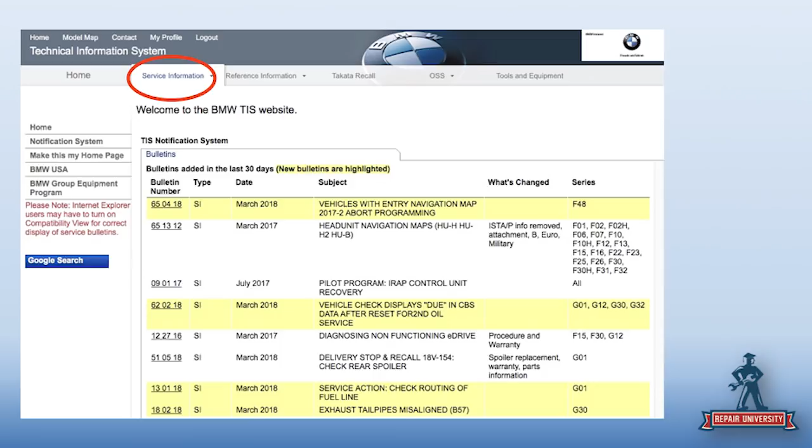To show you how quickly they change information, everything highlighted in yellow is within the last 30 days. So half of those are the last 30 days, and the other half are older than that. But aftermarket sources and companies like that are not going to be as up to date that fast - and it's the little things that change that we need to know about.

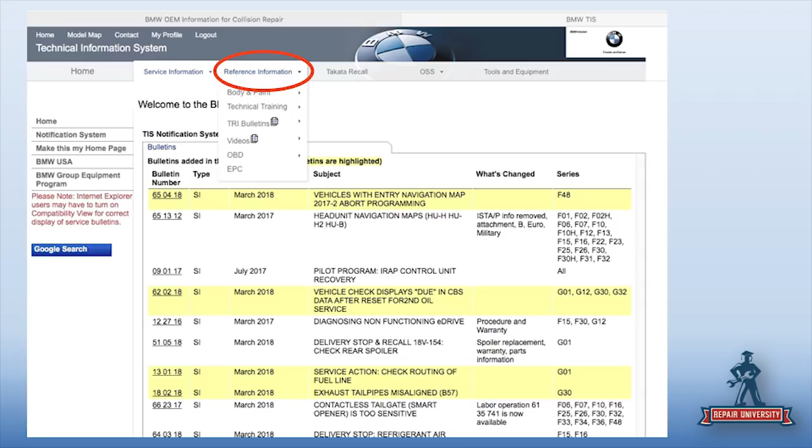Going over from the top after the service information tab, the next tab is called reference information. This was one of my favorite places. Obviously vehicle-specific information by VIN is what we need to repair the car, but there's a lot of great resources here. If it was me, back in the days of being an adjuster or claims manager, I would spend the $30 just to come in here one day and have access to this information under this tab alone.

Well, that you'll pay for. Yeah, there's some great things there. That I'll pay for. Now you're getting it - I wondered how long it was going to take. God, I owe you $20, Mark. He got on faster than I thought. I was sure it was going to be Halloween before Larry would catch on, but he's already got it in March.

So there's just some great stuff here. As an example, if you scroll down to body and paint and click that, you'll see all the little things that open up for you there. That's where you'll find their small damage, medium damage repair manuals, plastic repair, collision estimator training, aluminum and carbon fiber - it's almost like a little mini I-CAR in here, and it's fantastic.

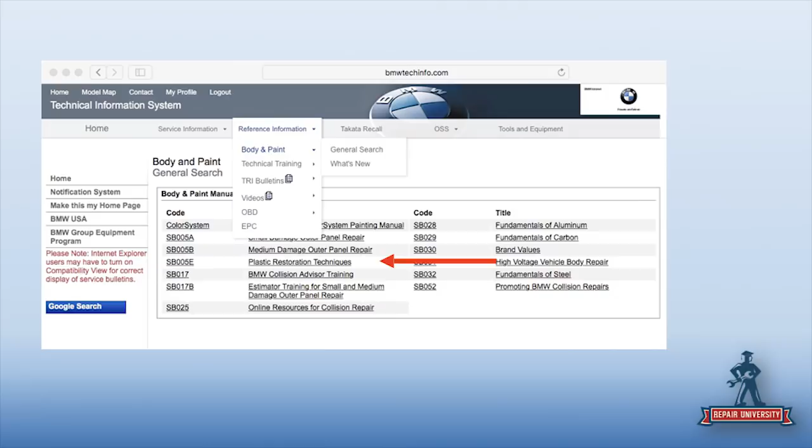Some of the stuff that you have - if you click body and paint, and go down to where it says medium damage and plastic repair, there are the courses. I even recommend new technicians, young technicians - you'll get more information for $30 than you can probably get from any other class. Just spend your time poking around and reading through it.

And you were telling me that Randy Perfetta and some other people probably played a role in some of this development. I believe Randy, along with Summit Consulting, who do a lot of training for the dealerships and for certified and approved shops across the country, had a lot to do with some of this technical training being put together. Randy originally started with Car-O-Liner Metropolitan with the Demerists, then moved on to Toyota. From Toyota, I know he wound up with AutoNation for a while, then went back up to Car-O-Liner Corporate, and now he's back with Summit, working with them and giving them his knowledge.

He runs a really good customer service class that we've attended - that was really, really good. He actually does a pretty cool thing that I thought was a great idea: he calls up all the shops who go into the class, and he tape records what they talk about.

Like on the phone, how you answer the phone, and then he plays them, and everyone's like, 'Oh, that's bad, that's bad, that's bad,' and no one really wants to say anything. I remember one of my clients I was there with in the class, he actually said, 'That's my guys, we need the most help,' and he actually hired Randy and Summit to come in afterwards and train his people for better customer service on the phone lines.

So the Germans overall do a great job with their hands-on training, their access to repair information once you're on their program, these mini classes or classes on particular stuff, and then obviously the hands-on training, which is why the Germans are so much far superior. I always talk about it, and those out there who've been through German training realize that. Those who haven't are like, yeah, okay, what's so great about them?

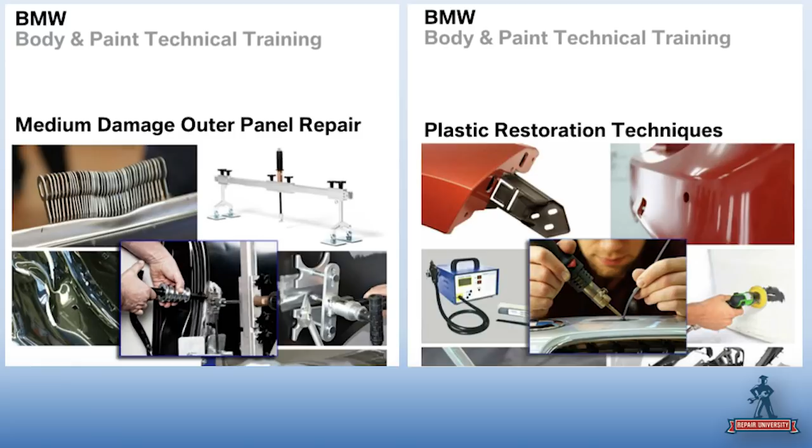If you don't understand a lot of dent repair, not just how to fix a dent but the theory behind it, where you put your keys, where you make a pull and why, how it affects body shaping, all of that is in the medium damage class. A lot of the science behind it. They even have an aluminum panel repair class on how to do aluminum panel repairs.

A lot of the procedures in the specific car stuff is also in the generalized area here, about what you can and can't fix, how much material you're allowed to put on, and stuff of that matter. It's great stuff.

I'm not a big fan of printing and saving, because this used to bite us in the insurance industry. We'd put out claims guides, you were supposed to update your claim guide every year, but someone didn't. Someone always squirreled it away at the bottom of their desk, and then we'd get a discovery notice for a lawsuit, and someone would bring out the claims manual from 1982, and we're taking depositions on a 1982 claims manual saying we updated it 26 times since then.

So I'm not a big fan of printing and saving because that always happens—you refer to it or make copies and hand it out, and then you miss the update. But this, if I had new techs or new estimators, even if we don't fix a whole lot of BMWs, this stuff is gold. Kind of like Toyota's classes in the first episode had some good stuff.

Scrolling across, we'll come back to the OSS one, but if you go across the top to tools and equipment, if you've ever wondered what tooling and equipment, mechanical and or collision repair, BMW requires—I don't want to say approves, but these are the required things to fix their vehicles.

It's approved equipment that's required to do the repairs, and without it you could wind up in a lot of trouble. I've been involved in cases where shops didn't have the proper equipment and couldn't prove they even rented or borrowed it—they just said, 'No, that's my equipment.' Just that alone can get you in trouble, besides the bad repair. If you did a perfect repair on non-approved equipment, you're probably not going to get investigated. But if you did really crappy repairs that are incorrect, and you also have the wrong tooling, it adds to the snowball that blows up against the shop.

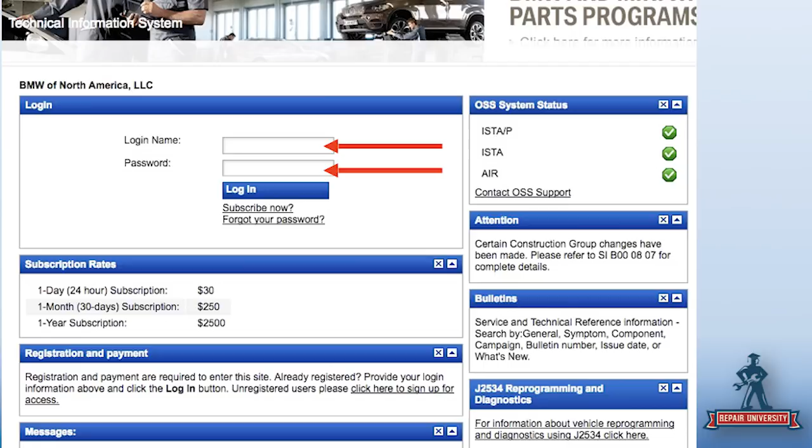After the site comes up, when that green square appears and says start, it's ready for you to go. If you remember, all the way back to the very first log on, when we hit the screen that says OSS system status with all the little green checks, that gives us that green square. So we know everything's up and online, they're not updating the system, we're good to go. We are ready to find our repair information.

So I click start, and it immediately takes me to a screen asking for the VIN number. You can do a lookup by body code if you know the body code. If you know the body code, right. I don't know the body codes.

And listen, like I've said before on numerous shows, Mark and I have said it, I-CAR, whoever's been here from I-CAR, usually Jason, we've always said the same thing: always put the VIN when you're using the OEM website. I know All Data has a thing for the VIN also, but always use the VIN for the OEM website, because you're going to get one important thing that you won't get if you don't put the VIN in. We'll talk about that in a second.

So for this particular situation, we went and got a VIN from a 3 Series. We thought we'd start with the 3s. Turns out we didn't get much further, but we got a VIN for the 3 Series. We have entered our VIN, and this is where it takes us to.

So now I know the status of the warranty, when the warranty went out. I know the service history of the vehicle. I know any recalls down to the technical campaigns at the bottom. If there's anything pending on this car, it's there for me. I know the color, and now I have the body code.

So for people like me, which molding and trim package, and it's an F30 - this quarter is good for these years on this body, and it's like, oh my God, which one? This helps answer those questions for me.

And there's a lot of cool things. I know you're going to click through here, but you've got repair instructions on the F30. Look at all the other stuff that they've got in there. You could click around, and you've got your torques, your technical data, repair and maintenance, operating fluids. There's a lot there.

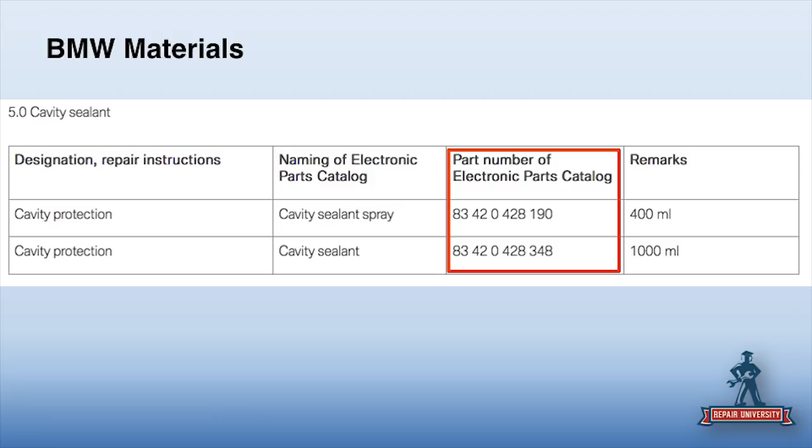For here, there's 2 different sizes of their cavity sealant spray, cavity wax that you can buy. Those are the part numbers for it. BMW says put it on, plain and simple. If you don't do what BMW says, well, you didn't fix the car right. The easiest thing to do is order from the manufacturer.

We have cabinets at the 2 shops I'm mainly at all the time, my shop Exclusive, and then MIC. They have actual cabinets with Benz, Audi, Porsche, Volkswagen, and all the stuff that they need that they can keep without a born-on date that's going to go bad. They keep it in there, even adhesive, because they know BMW goes through a lot of adhesive, so they can buy stock of like a case of it, because they know within a month they're going to use it.

There's rivets, there's all sorts of stuff, and then we have separate drawers with the known clips. All the clips are in, the extra clips are inside the cabinets, but now you don't need to mix anything. So now when you need more cavity wax for the BMW, it's in the BMW section. If I'm doing a BMW and a Mercedes-Benz, I'll go to both cabinets. If it's the same product, not a problem. If I'm using different products, I have it there at my fingertips. It's set in, almost like a supermarket within your own body shop.

Yeah, and you just go in and check it out. The great thing about a part number means it's pretty easy to put that on an estimate. You've got an invoice, you can put it on the estimate, and even if you don't put it on the estimate, do it for free. At least you're doing the right product.

Most of the dealers wouldn't know this because not a lot of people order it. The dealership doesn't usually order it, so you would have to give the parts manager, or part guy, the part number. He'll get it for you, and it makes it that much easier for him and for you in the long run.

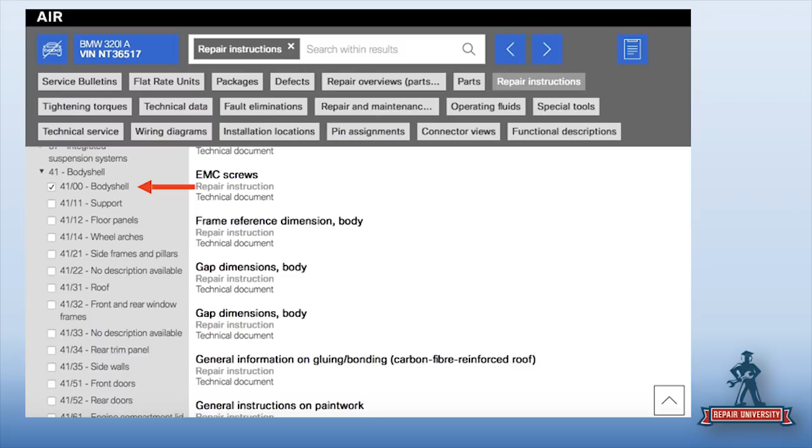Scrolling through there, when we get to that general under-body shell, one of the other things you get to is material identification. We have a great panel identification here, and I got to know the body numbers to know what the panel is made out of, aluminum, plastic, or steel. I find my body number in there.

So if I'm thinking about what's repairable, not repairable, we'll get to a little bit of the guidelines, and there's a lot of numbers there. I'll tell you this much: when you go to the certified training, they give you a sheet each time of all the body numbers, because sometimes there's a new model that comes out, there's a new body number, or the 3 Series changes enough that it loses that body number and goes to a different one. So we'll get that listing to understand what it is, and there's a cheat sheet I utilize for myself.

But if you ever get confused, seriously, all you got to do is Google, say, Wikipedia. You can Google in Wikipedia, BMW F01, F02, and it'll give you the listing of each one.

That's a quick, fast way of getting the information, so at least you start to get acclimated to the vehicles you're working on and exactly what they're looking for, because they make a lot of the vehicles the same. Normally your estimating system, when you pull it up and put the VIN in, it'll give you the body number there too. You've got to look for it.

But I always tell people, for me, material identification in the estimating systems has been a little hit and miss. I'm just saying from the body code, the body number they'll give you. So if I get the body code through the estimating system, I will say this much, All Data is good at that too. You can look it up in All Data.

So let's say you wanted to find out what all those F numbers are and you have All Data, but you're using the BMW site. If you go 2015 BMW, and it gives you the list of cars, just open the cars. You'll see the 3 Series, and in parentheses will be the body number. That'll help you out too.

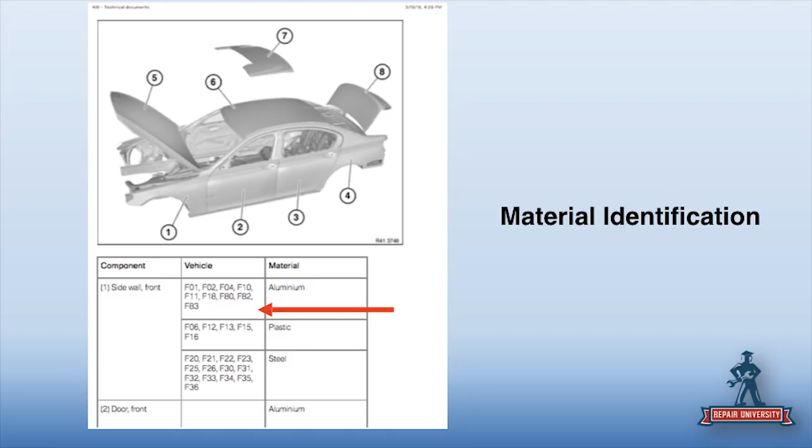One of the things I learned from my conversation last week with some of the BMW folks was that while the 3 Series particularly is mostly steel, when we get into the M packages, some carbon fiber and other things are going to come to the table. So knowing my material identifications and knowing that body code, not letting the estimating system tell me what is aluminum or steel when I'm making my repair decisions, is critical.

One of the things I love about what BMW does is they classify body repair levels. There are 3 levels — 1, 2, and 3 — and we'll show you a little bit later as we get to procedures. As you're going through procedures, it automatically tells you what level of repair BMW classifies this, and within those levels there are certain requirements.

So Mark, talk to us a little bit about the levels. Well, level 1 is regular basic bolt-on type stuff, outer body, skin components, that kind of thing — so level 1 is your basic, you know, replacing a fender or something like that. Now body repair level 2 and level 3 — the big difference between the two is whether you're going to put it on a bench or not have it on a bench.

So when we look at the 3 Series here, we replace the quarter panel, and in that particular case it says body repair level 2. Well, what does that tell us? Very simple — we're not going to have to put it on a bench. Now if we're on a 5 Series or a 7 Series, and it says it's a body repair level 3, it's going to be on a bench. So if we see body repair level 2, it's without a bench, and level 3, it's with the bench. It's actually really simple.

Yeah, and that's a good key to me for estimating, because if I have to bench a car, it doesn't mean I'm necessarily setting up and measuring a car, right?

And then maybe I have to set it up and measure it, but then I'm also going to have to pay to re-bench it for the repair process, and then I'm going to have to pay dry time, or push it in the paint.

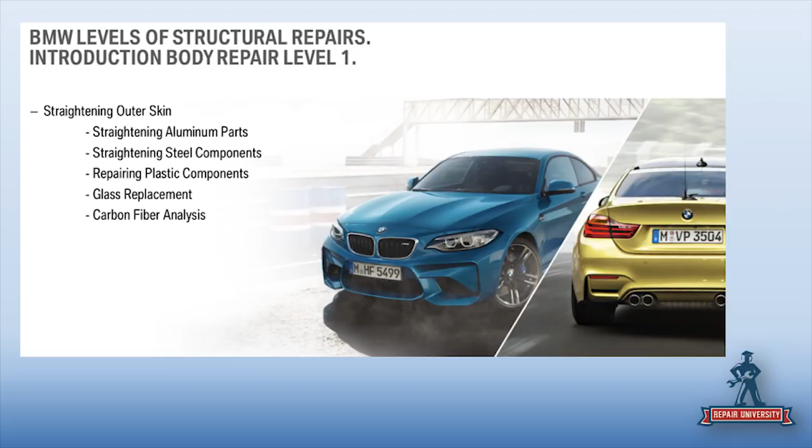Straightening the outer skin, so body repair level 1 would just be straightening. A lot of PDR level 1 can happen a lot. That's going to be your straightening of your aluminum, your steel, repairing of plastic, glass replacement, and analyzing carbon fiber. All that's considered level 1.

So let's talk about dent repair a little bit, because BMW has some really strict guidelines on what is and isn't repairable, what you can do, and then they give you some great training on how to fix their cars, which is just fantastic. I definitely now, watching this a little bit more, understand the value of the STEP program that they have.

So they always say that their STEP techs are all over the country, and now you kind of get it if this is the kind of stuff. I believe almost every program out there right now has a former BMW STEP program person that's involved in their certification program, that has a hands-on training program.

I was with Taylor from Mercedes-Benz last week in a class, and we were talking about Walter Malik and BMW and the training. But almost everybody Walter Malik has touched as a trainer and taught and cultivated are part of some sort of program. Sean Hart and Kelly and everybody out there has been along with Walter at one time or another from BMW, and all these guys started a STEP program.

Well, you think about it, it's amazing—everybody coming out of there, from David, who's kind of the collision tech industry, to Josh, to Gabriel, who was there before, to Nick Brown, to Sean, to everybody. I guess there's a reason why they're all so cool and we like them. So there's some people we don't like—we'll talk about them later, but these people we do.

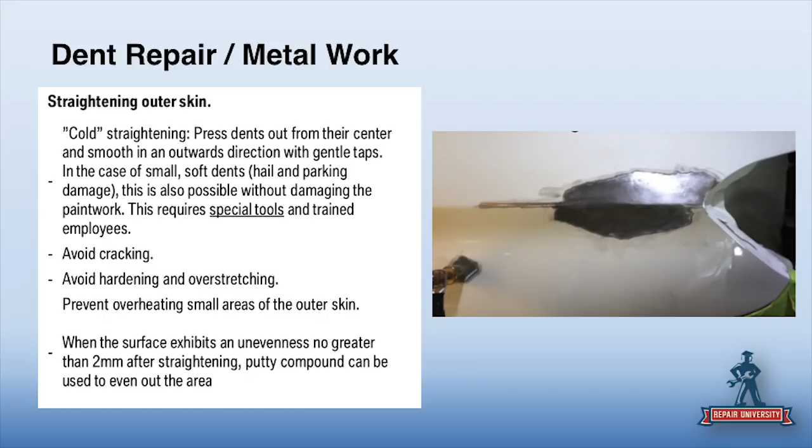This would not be 'go to my toolbox and grab my old spot welder from 1985, stud some pins on there and go crazy on it.' So when it talks about avoid overheating a small area, that's kind of what it's talking about. They also don't want you overstretching, to avoid work hardening and avoid heating the area. They don't want you doing metal shrinking on the panel either, because if you've got to shrink the panel, you're never going to get to that 2 millimeters, and that means the panel is overstretched and you shouldn't be repairing it anyway.

Right, so some great guidelines there.

But then, Achtung! So they go a little bit further. Yeah, I love God bless these. I love being able to say this.

They go a little bit further because it's not just about the sheet metal with BMW. There are some sensors on certain panels, and they give us the guidelines of where those are located. Based on where those are, I've got to be careful about repairing in those areas.

So door pressure sensors will limit what you can and can't do on a door skin. You've got to be very careful with these new door pressure sensors. If I walked over and kicked that door, this door, the BMW...

Don't kick my door. Yeah, I'm gonna.

Let's test it. If I kick the door as hard as I can, and I now change that air diameter that's inside that door area, that door capsule, that car's unsafe to drive, because then not enough air is going to push through there to actually have that sensor work. You might have now pushed in the door 7, 8, 10, 12, 15 millimeters in if you put a straight line across it. And now if you get hit again, the airbag will read differently because not enough air is being moved through there. A lot of these doors - we just went over this last week in class at Mercedes-Benz, which is similar to this BMW.

When you take these door panels off, a lot of the doors are encapsulated. The weather barriers, if there still is a vapor barrier, most of them have a cassette. It's got to go back in. You can't just cut it. That's why now it's hard to cut with a razor blade - it doesn't slice wide open or rip open. You've got to cut that thing pretty good. It's a thick piece, and it's glued on really, really well.

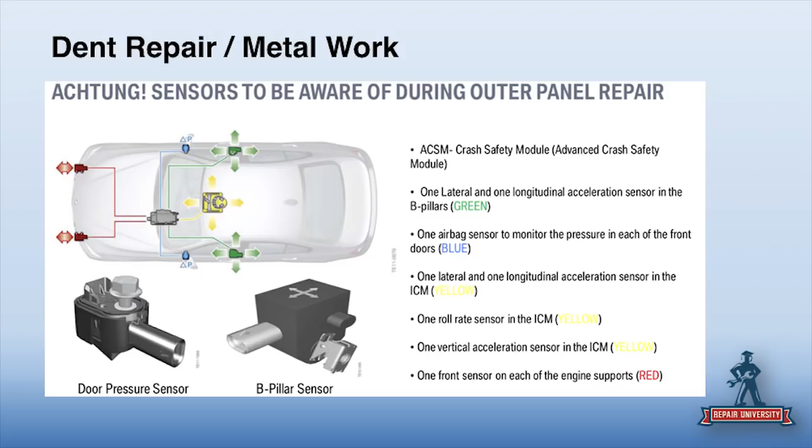So they moved them off the pillars, put them in the doors now, so a door cavity with a big dent can cause an issue and make it not safe to drive. So you mean putting duct tape around that to seal it up? No. Nope. Also, just choosing to throw it away and not reinstall it - yeah, not put it back in.

How many times have we seen that, though? Oh, all the time. You can still walk through shops today and see them peeking out of the top of trash cans. The funniest was, I remember the guys used to cut them off real nice and neat, and you'd think, wow, you did a really nice job. They'd stick it to the wall by their toolbox, but they didn't put it back together. So now the guy's got like 30 of them sticking to his wall. Like, those are real nice, you did a nice job taking it off. Why didn't you give it to somebody to put back on?

Well, I didn't want to buy a new one, so I cut around it. I didn't want to expose that sticky garbage that Honda's famous for, but I wanted to get that out of my way, so I just left the plastic over the sticky stuff, cut the hole, and put the door trim panel back. If you're a real body man, you just rip a hole in it with your hands, kind of like a cat clawed its way through, reach in there, do whatever you got to do, and just leave it that way.

From a sensor standpoint, there's no computer that's going to pick up that it happened, so there's not going to be any light, it's just not going to function. In this case, you also want to pay attention to sensors located within the bumpers. We're going to talk about that in some upcoming slides coming your way.

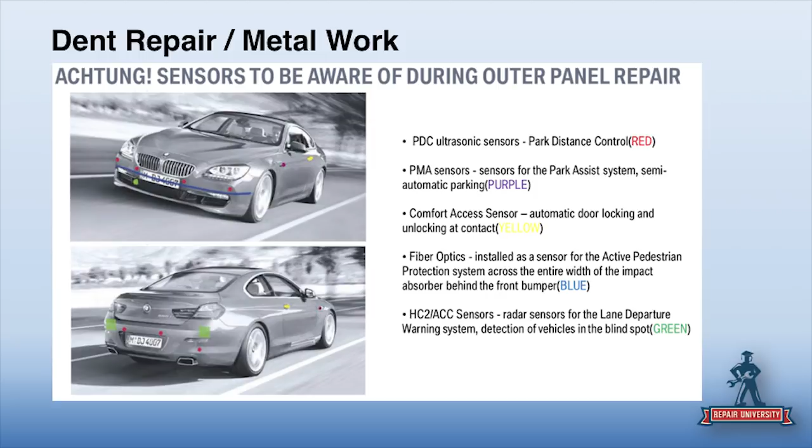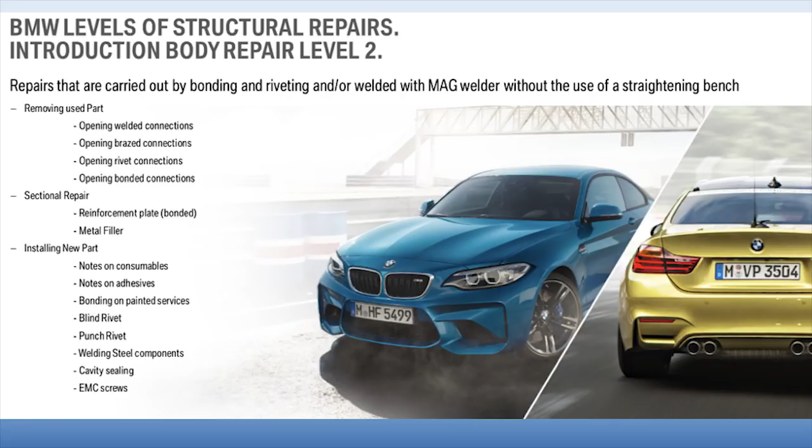But I do need cavity sealing. Oh, absolutely, yes, you definitely need cavity sealing. And when you get to this level, when you start changing out panel parts, a lot of times they require bonding with rivets, and now you have the EMC screws that you're going to have to get, and that's a whole procedure in itself to know how to put those on.

We're coming to EMC screws. Yeah, and then we'll kick it up a notch. Level 3, obviously we're now on the bench and we're going to be welding, spot welding, mag welding. I know we started the program off with this, but again, we're still just writing the estimate now. We've got to know this when we write the estimate, not when we're fixing the car. So not only does it tell me what consumables I may need, what the extra procedures and labor is going to be, but also how much time is going to be involved and how much space in my shop this is going to take up.

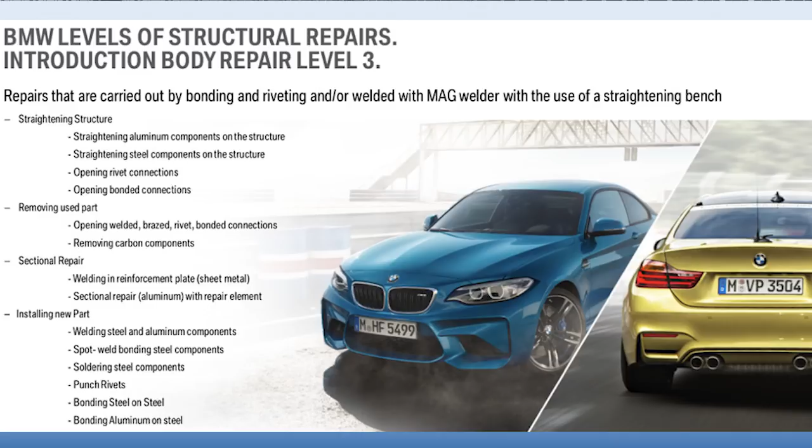There's a difference between a car that has to stay on the bench. Maybe Larry, you have what, 20-something Celettes in your shop? At Mid-Island, yeah, they got about 20 Celette benches. So if that car's got to stay on that bench for the entire repair process, I have to think about that. And you also have to figure out the bonding for other level 3 repairs. You've got to remember, a lot of that bonding requires it to sit on the bench unmoved for a specific amount of time.

So that's another thing you have to take into consideration when working with these bonding, riveting type vehicles. Aluminum shops have that down pretty pat. So as an estimator, I'm not only thinking about the time my technician is actually working on the vehicle, but I also have to allow myself to be compensated for work loss, because that's occupying all my stalls at that time.

One shop may classify it as work loss. Another shop may just say that's a $200 an hour labor rate to work on that car or whatever. But there are different ways to think about that as an estimator.

So let's talk about front bumper covers. I imagine this is going to change soon, but right now, if you are working on a bumper cover and it's in the area of a sensor, BMW says, hey, don't fix that. You have a warning that says there can be no mechanical damage, and for Germans that means a scratch, a dent. There can be nothing wrong, and you can't do any work or repainting within a 10-centimeter radius of that sensor.

So it's not like I can just fix over the sensor. I've got to go out, I've got to get this radius, because that's the lens through which it sees and operates. It's like beer goggles, right? I have one goggle that's like 20 times and one goggle that had no beer, and I can't see what's in front of me. So, no stickers, no nothing.

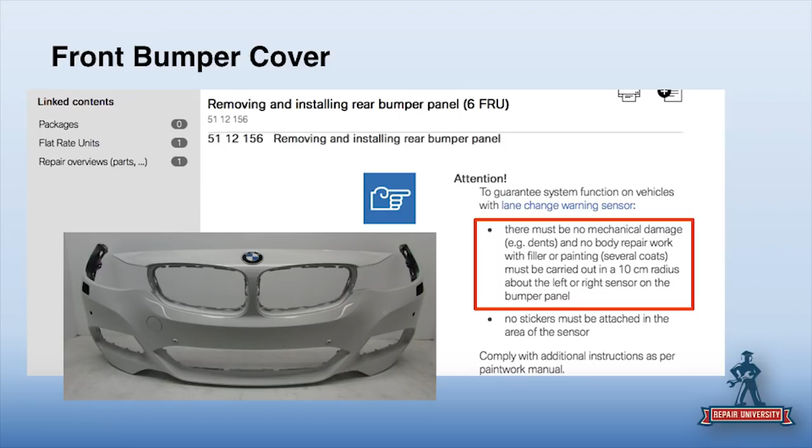And this is where you're going to wind up with this issue. I want to be clear that this isn't just about repairability—it's not a matter of having a scratch that needs some minor filler, plastic repair, or refinishing. This would also mean don't blend into that area. So if I'm working on that quarter panel, there's no blending into that bumper. You've got to remember they're fascias, and unfortunately because of the thickness of the material, it sometimes has to be seen through the plastic substrate and then through the paint material. But now with all the other ADAS stuff going in there, just paint alone can block it, and now you're going to wind up with probably a lot of replacement of bumper covers.

It's my beer goggles—this one's had 20 drinks, this one's had 2. We're going to see things differently.

And unfortunately, when you take different autonomous type vehicles—like recently there was a car, an Uber, down in Arizona—not to go crazy with it, but something went wrong there, and something happened. Now, I'm not saying the car was repaired, but if it was repaired, they would start to look and see what's the history of this car. Oh, geez, they blended the bumper. This could fall back on someone even if it wasn't a shop's fault. So we really have to pay attention to this, because this is becoming potentially life and death.

Yeah, and I want to drive this point home.

One of the first things out of the gate in the repair procedures we pulled is bumper covers. We understand there's a lot of pressure out there right now around plastic repair. It's being pushed really hard. It's kind of become the latest and greatest thing, and this is one of the reasons why plastic repair just doesn't really work in some situations.

I've seen a lot of posts lately of people bragging about what they can do with bumper covers. That's just, it's a no. Well, it's fine on older bumper covers without any ADAS stuff. Listen, knock yourself out, I'll be honest with you.

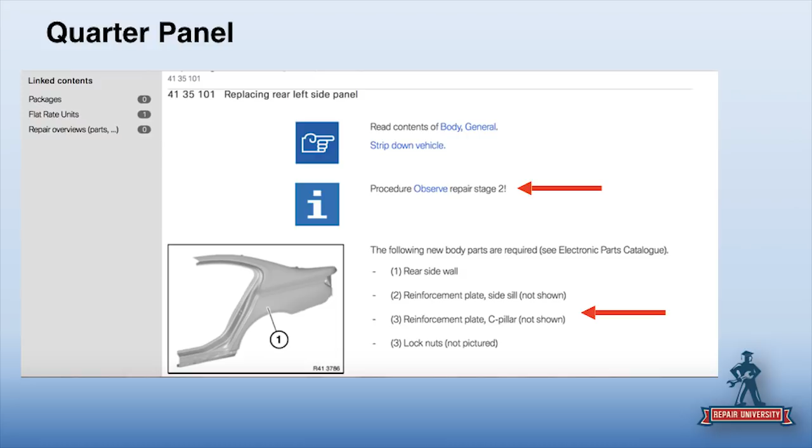The other thing that it tells me here really nicely is it tells me, one, I need the quarter panel, right? Gotta buy that if I'm going to be replacing it. But it tells me that there's some other things that I'm going to need there. So not just consumables, but if you're going to replace the quarter panel, here are some other parts or body parts that will be required.

Does it say recommended? Nope, it says required - here are some other things that will be required. But if it did say recommended, we would consider that to be required. But for those that go, man, they don't really spell it out for me - no, they kind of do. Well, there you got to realize the difference is legally on some of the judgmental things.

They're going to say, like oil, they're going to say recommended because you can do whatever you want. But if you replace this part, those parts have to be replaced also. You have to buy those things also because they get destroyed while changing it, or they're attached to the quarter panel, and these new pieces have to come in for whatever reason. They're not attached maybe to the quarter panel, or these are additional materials.

When we talk about CCC, I do love Susanna Gotsch and that team puts out some really great reporting for us. And what they recently did in the crash course, they said about 75% of the cars that were estimated last year should have been scanned but weren't scanned. I'd love to know how many quarter panels were bought, but then how many of those parts weren't bought with them. Those are the stats I want to see - well, suspension parts that don't have nuts and bolts bought with them.

Yeah, the other thing - so we're still in the estimator zone, right? We're not got to the technician yet and him putting the car on. The other thing that BMW very clearly spells out for me is all the consumables that will be required to put this panel on. They are not included and need to be charged for separately.

So we know that we have the same adhesive but 2 different sizes, so we're going to need the large and the small of the K5. We're going to need the blind rivets, the punch rivets. We need 3 of the EMC screws. I need the cleaning agent. I need the cavity wax remover. And I need the D1 sealant on those.

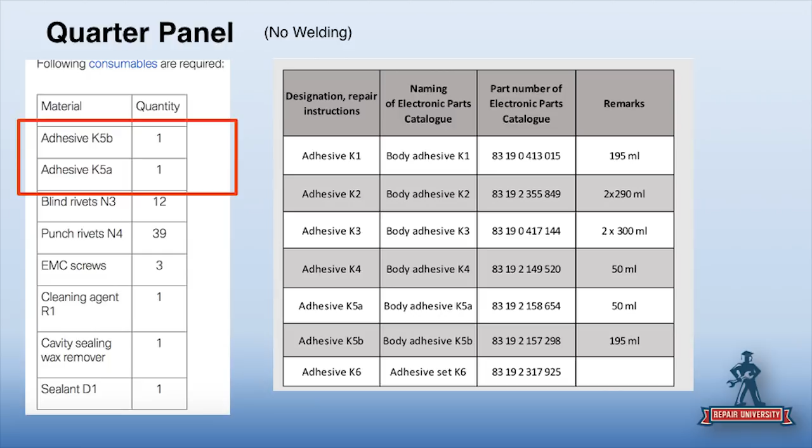You want to make sure you are always using the correct adhesive, because if you don't... this is pretty straightforward. If you use the non-approved BMW adhesive, people die. If you use the approved BMW adhesive, the panel reacts as it is supposed to in the collision.

You can see here they designed this particular part to crush much like a can would, so it's going to come straight down on itself with the applied impact force. Same applied impact force, but the lap shear strength of the material was different. It could have been much stronger and didn't have the ability to let it collapse upon itself. Remember, some of this adhesive, oh, it's stronger adhesive...

Yeah, that's great, but you made it not necessarily stronger—that's not what we want. They wanted that weaker adhesive because they wanted these gap areas, this ability for the material, the metal substrate here, to crush and fold in this particular fashion. This is why it's very important to realize you can over-strengthen something and actually make it worse.

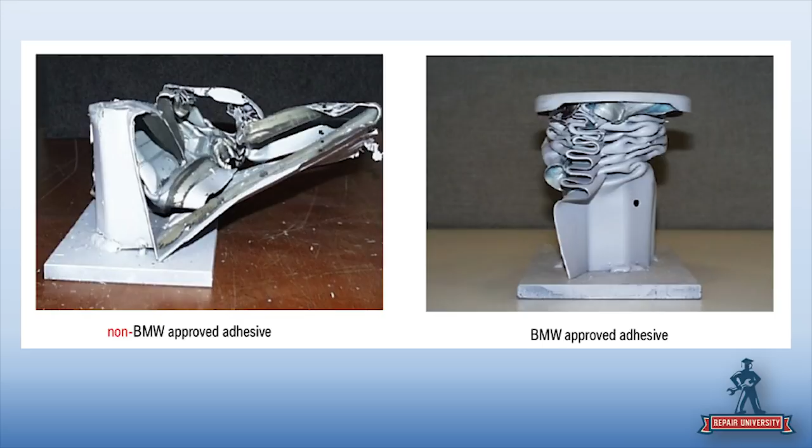Yeah, and that's what happened here. This would affect airbag timing, and this would affect occupant protection. This could seriously, significantly cause a lot of damage to a person. We just don't want it stronger, we don't want it weaker.

We want it the same, the way they said. Why is that so hard to get through to everybody? 'I made it stronger.' No.

Okay, and then EMC screws. So I had some fun learning about these. I learned that they frequently tend to change or fluctuate in repair procedures.

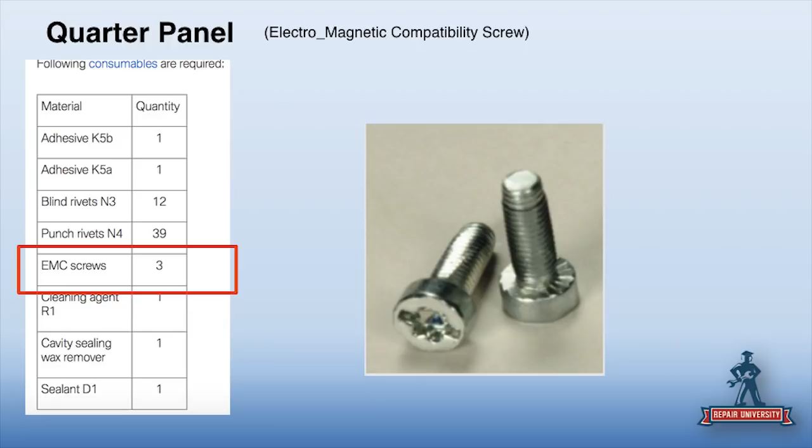So this is another part I would like to know how many of these actually get ordered on cars. Is it just a screw that holds the panel on while the adhesive cures, Larry, or is there a function for these screws?

No, they make the electrical function so that stuff attached to the rear body panel goes through the quarter panel. It completes the electrical circuit, the grounds and stuff, because the adhesive we use is different. A lot of the adhesive the manufacturer uses is baked at about 400 or 500 degrees when the car's getting electro-deposition primer sprayed on, or when it's getting a final bake. This stuff hardens up or cures. We can't get that type of heat, so we have to use a different material, and that might be different chemical composition than what the factory uses.

So at the factory level, they can use rivets and glue, or in the case of resistance welding—weld bonding, I should say—whereas in the aftermarket field we're using rivets, so you're not getting that same connection. That's the issue. They need these screws to complete the connection between panels, to really make sure it's there.

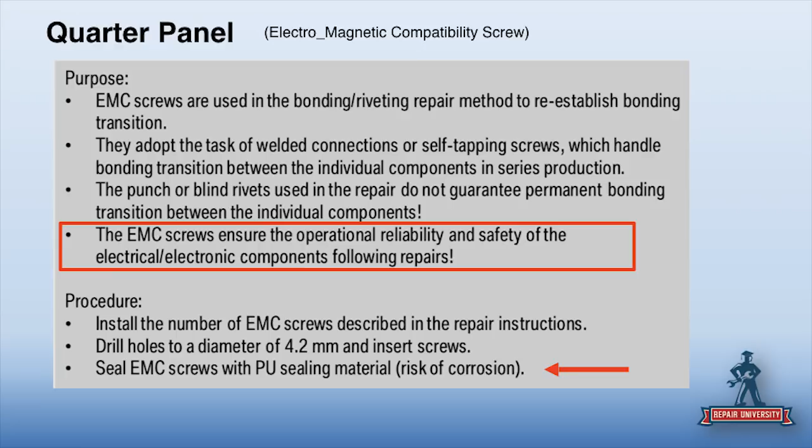So this is a prime example, kind of like when we were talking about quarter panels last week, where it's not that way from the factory. Completely different. I'm not going to see these when I tear a car down, but I'm going to put them back in when I put the car back together. And this is a proper repair based on what they told you to do. I'm going to put sealant around them so I don't risk corrosion protection. And I've got a very specific size hole they have to go into. These are great instructions on how you do these.

And how this is going to show up - depending on the circumstance, it could be where the radio station comes in a little fuzzy, and you just can't figure out why. Yeah, well, we left that out.

One of the examples I got from my education last week was, hey, we had an issue with electronic feedback, static in the radio stations, and it used to be 3 screws and now it's 2 in the panel, or it used to be 3 and now it's 6, or whatever.

But you could have a situation where a shop follows three-quarters of this and doesn't put the screws in, and then the customer complains about the radio not working. Now the top-notch mechanic there is going to change the antenna, maybe the antenna wire. Oh crap, let's pull the dashboard, pull out the radio head unit, and let's change that. Now, be honest, you're probably into $6,000-7,000 worth of stuff.

And guess what, you could change every electronic component in the car, and it's still not going to change the radio signal. Honestly, this is probably a situation where you look at the customer and go, 'We didn't fix your radio, we just did your quarter panel. It's not part of the claim. We don't know what you're complaining about.'

But also, if you don't do the sealant properly, it may work for the first 6 months or a year after they drive out of your facility, but when that corrosion protection starts to break down and water gets in there, that becomes an issue. Now I'm back with my radio problem a year later, but I didn't come back for it. And you're talking, it's not a big hole, so what happens is it can get corroded, and that can actually pop out or fall out or become loose, and now you're going to have an ongoing, on-off, sporadic, intermittent static problem, and now it becomes a real annoying thing.

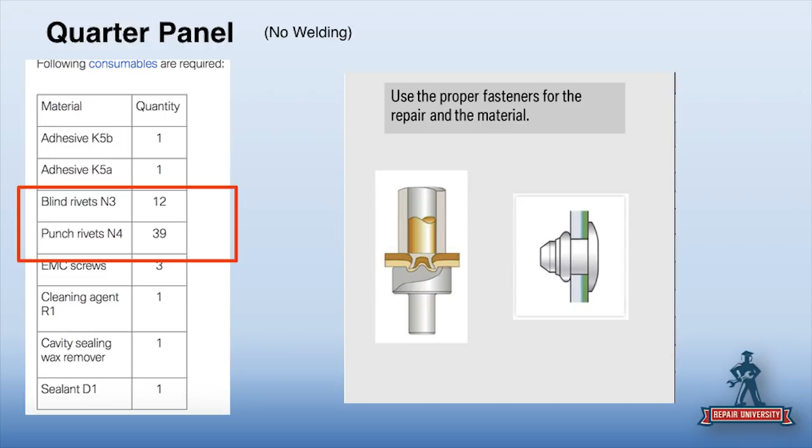So each rivet is slightly different. You might be using a similar rivet tool with enough pressure to collapse it, but these rivets are rated to a certain different degree to hold that area. And basically all this sealing and riveting comes down to one thing from BMW - what we've been told is it's for corrosion protection. Yep, it really is, a lot to do with corrosion protection and sealing. It's a lot easier to use riveting than welding for many people - it's a safer, easier, quicker repair.

Now, just playing off last week's show, would a used BMW quarter panel be an option? Well, BMW addresses that in the 4100.

General procedures - it's got to be a new OEM part, end of story. But how are you going to get it apart? It was welded, now we're going to rivet it. Well, now it's bonded from the factory, so you're going to destroy those flanges. How are you going to get it off? First of all, how are we going to get a rivet into there to make it set up? It's just not going to work - the holes are too big.

So as we went through the same cadence that we went through last week, do we have any reason that we can't follow the OEM procedure?

I think the 3 Series is a great example of a car that we're going to repair completely different than it's built at the factory. Well, any BMW basically in the quarter panel section is built completely differently than how we're going to repair it. BMW and many of the German manufacturers - the repair, when we're done with it, is going to look different than it looked when it came out of the factory.

Yep, absolutely. If you're one of those technicians that look at a car and say, I'm going to fix it just like the factory, or if you're a shop owner that has technicians who say that, be afraid.

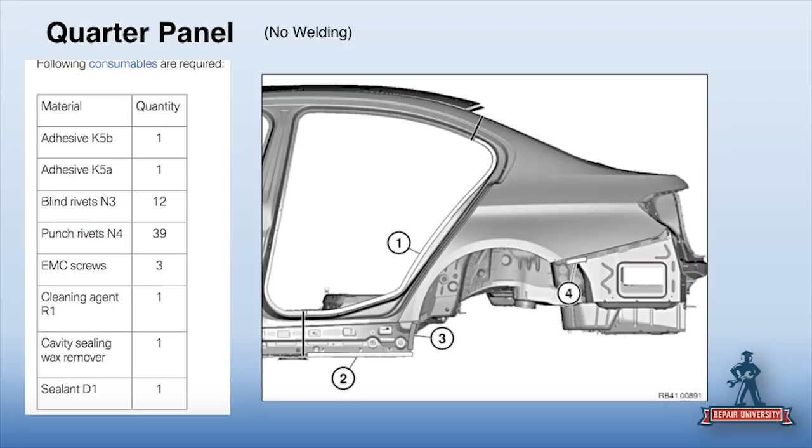Larry, a piece price for those - what do they cost each? Rivets in general average cost anywhere from 95 cents all the way up to $3 a piece, depending on which rivet you're going to use. In some cases you need 100 rivets for a particular car, so you really got to have it priced out right.

The rivets really don't go bad at all - they don't corrode or anything, they usually have a coating on them. We have a bunch of rivets in the drawer because we go through a lot of them, so we have a lot laying around. In reality, some of these are very tiny, so you can lose them.

A $600 quarter panel, but I may have a $400 to $500 consumable bill that goes along with that. This particular car, if I remember correctly - don't quote me 100% on this - you're probably looking at $400 to $500. It's between $400 and $500 in material alone.

As opposed to - I can't give that away as a shop - a Mercedes-Benz S-Class is about $1,200 in material. So you've got a range there with these different vehicles of what you're going to have to purchase in material.

The adhesive obviously is taking a lot of that price up there. But you start adding up a bunch of rivets - you could easily have 30 rivets on a quarter panel. On a Mercedes-Benz S-Class, to change the rocker panel, you're looking at about 120 rivets. Even at $2 a piece, that starts adding up - that's expensive, that's a big amount of money.

The other thing they do great in the repair procedures is they will specifically call out tools and equipment - some things I need, like the punch rivet extractor for this one. Just punched in really quickly and it tells me I can get this from Reliable Automotive, so Dave up in New Jersey can help me, assist me with getting this equipment. It gives me Dave's phone number right there.

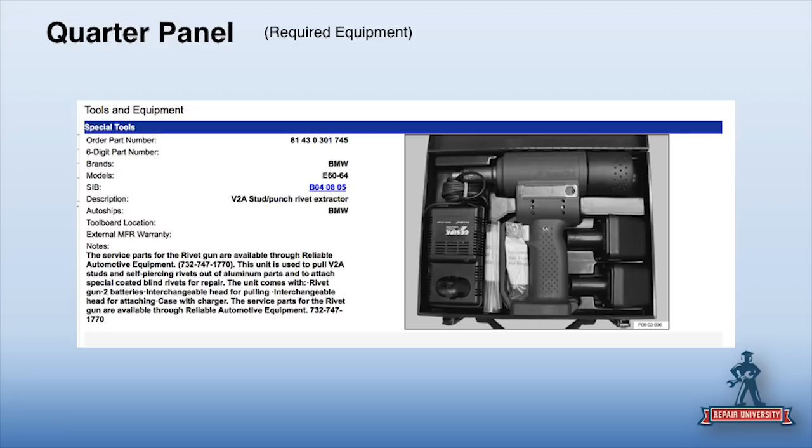For most of the German companies, like BMW, you're going to have this. Also the Express 800's on the program that gives you a bunch of different heads for a wide range of vehicles. Dave also exclusively sells that in the United States. The OEMs are getting better with overlapping of rivet guns - a lot of them are picking up on the Express 800, which is nice because it has interchangeable heads.

Cadillac just came out with their program. They offer a couple of options, but they also picked the Express 800. You just buy the kit that says Cadillac on it. You already have the Express 800, so now you can just do the interchangeable heads.

I'm going to jump into this because, okay, so I'm a regular shop and I don't have one of these. I buy the quarter panel, I buy the rivets, I buy the glue. Now I've got to get a gun. What am I going to spend for a gun? Well, you can buy the Big Daddy rivet gun, and if you get like two guys the size of Arnold Schwarzenegger back in the day... No, not that gun, the gun that's on the screen right now. Oh, that gun, the right gun.

So what are we going to spend for that tool? You could spend anywhere from some of the rivet guns on the low end, about $2,500, all the way upwards of about $15,000 for a rivet gun. Then the Cadillac kit might be in the range of $5,000 to $7,000, let's say, for just the heads. So if you have 5 or 6 different companies, Audi, Porsche, BMW, you're going to have $4,000 to $8,000 in heads for each one of these things. It usually comes with 3 or 4 different heads on there.

You'll have literally boxes and boxes of stuff piled up, just kits, and even though they have numbers on them, we label what they're for so we can see it easily - BMW kit, Audi kit - so we know just what box to grab along with the standard.

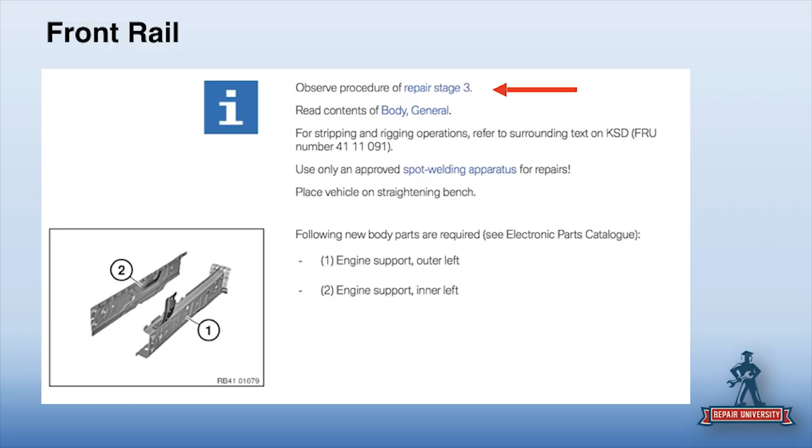That's helping us make the decisions on repair, total, and what to charge. Repair stage 3, so I know it's going to the bench, and I'll learn later how long it's going to be on that bench and what all it's going to take. Then it tells me to do repair stage 3 and what that is.

It gives me some things I need to be aware of when it comes to welding, like only using their approved spot welding equipment. So right away, level 3 means it's going on the bench, and there are only 3 benches it can go on. What are those three, Larry?

You'd have to buy all of them. Well, actually I only have 2 of them. Funny enough, it's all the C's - car bench, Celette, and Car-O-Liner. And plain and simple, if you're repairing it on anything else, it's an improper repair. Plain and simple, no one cares about your opinion or what you have to say. That's already going to screw you.

Now, it's highly unlikely you're ever going to get caught because you repaired it on a different machine. You did something else already wrong to this car, so it's now become a bigger snowballing issue, and this is just going to put the icing on the cake that's really going to get you pretty badly.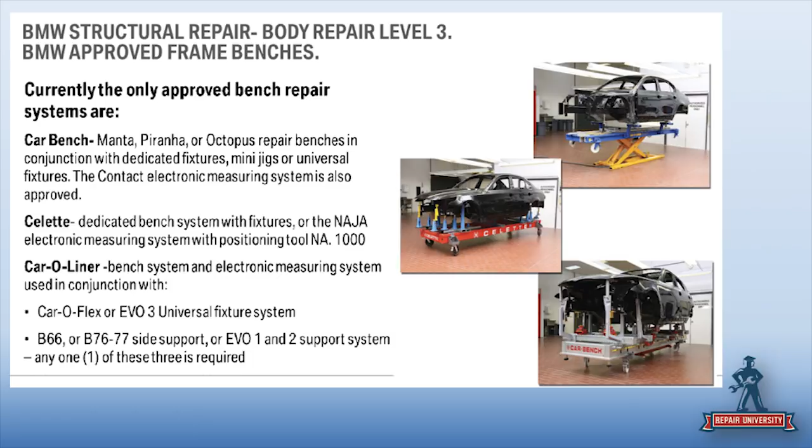Basically with the Celette and the car bench, they're similar in that they're a jig type system. With the car bench, it's universal - it'll fit any car they have measurements for and have been approved for. With Celette, you'll rent jigs. But basically those are the two, well now we have the Chameleon system from Celette too.

The 2 bench systems go ahead and you're basically building the car on the frame machine, building the specs on the frame machine, then comparing the car to the body. As opposed to the Car-O-Liner, even though they have the Evo system which acts like a jig fixture, it has to be measured with a measuring system to put it in the right place.

So that's basically the different processes between the two. Both give you the same repair, the same accuracy, but the fact is you choose what you want to do. I know a few shops that have both Car-O-Liner and Celette - a lot will opt to put it on the Celette bench for front rails when the motor's got to come out, and for anything on the side or rear they'll usually use a Car-O-Liner. That's just preference and a little bit of speed difference, and either one is acceptable.

My thing for me is I have really enjoyed learning that Celette system. It wasn't as scary as I thought it was going to be.

Yeah, all the stuff I've been telling her for years that she didn't want to listen to. Well, come on now - what is this again?

Like this - I finally found a use for all those coat hangers I can no longer use when welding. They're great for lining up the fixture system on the lift. See, that's the big trick to let people know - when you have it on a 2-post lift, you take hangers, straighten them out, and use them to line up your holes.

So if you had to do it by yourself or with just two people, then you can move it around a little bit, and as it comes down you see the little plumb lines you're hanging out.

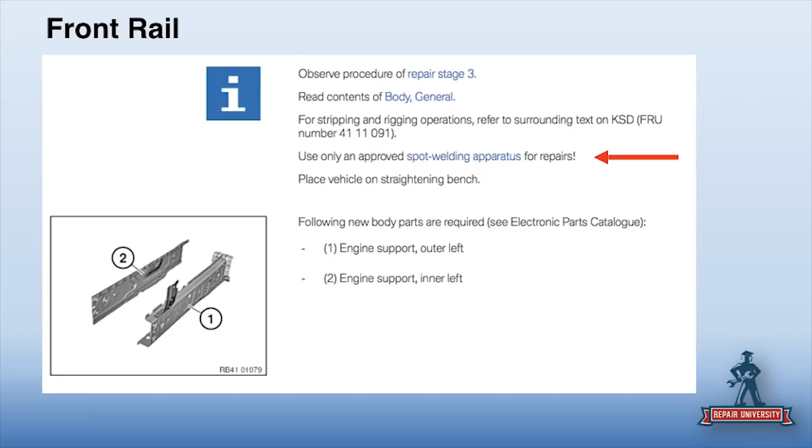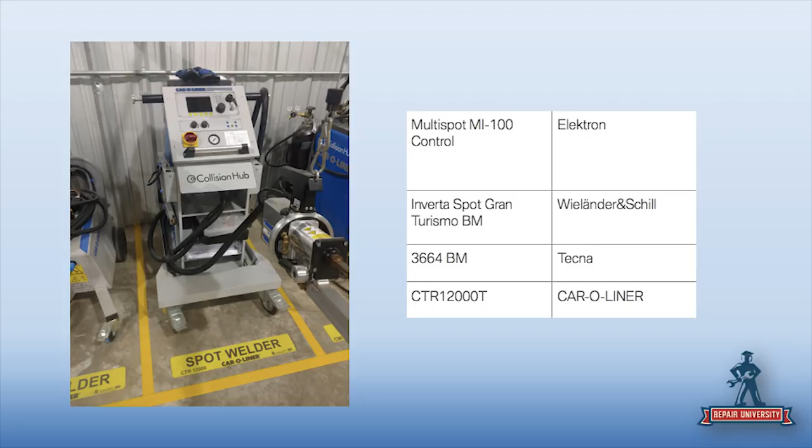So we'll go back to that procedure on the rail, and now they're telling me that for that rail I'm going to do some spot welding. If I click approved, where it says blue, spot welding apparatus, it tells me what I can and can't use. Thankfully we do have the CTR 12,000 here in the shop, so that's one of the approved welders on the list you can use.

Now, we thought about originally when we were putting this together that we're going to do the 3 and the 5 and the X, and talk about the things, and we realized this would have been a 6-hour program, almost a 6-week program, right? But really quickly, you can see how you get in there, you get through the information, and everything you need to know is there.

Obviously scanning and finding your diagnostic information and calibration is a completely separate section. Although this may be a brand where I'd say let's go to the OE for it, let's go back to the dealership for some things.

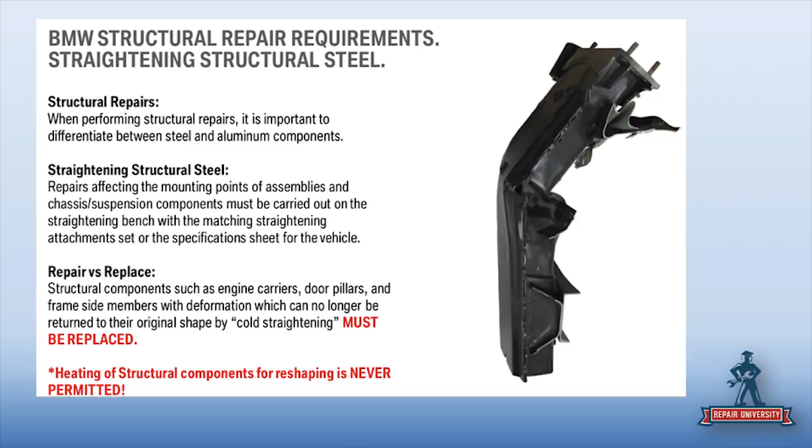But BMW does have some rules on straightening and repairing structural steel, and they've laid those out pretty plainly on what you can and can't do. If it is deformed in any way, if it is misshapen in any way, all of those convolutions in the design are there for a reason—it's not to make it pretty. So if there's anything you can't get out, then you must replace it.

Basically, based on this alone, everything our good buddy Arthur did was completely wrong. This comes into why techs will say, I can do this, I can do that. I don't really care what you can do—you can't do it. Then someone will say, well, the car's going to total. I didn't build it, I didn't wreck it, not my problem, get rid of it. You know what, do me a favor—I'll package it up really nice and neat and I'll even put the procedures in there for you, so when you sell it and Arthur winds up with it over in his country, let him fix it. I'll even give him the procedures. He's not going to follow them, but I'll give him the procedures.

One of the things we saw in the video, Arthur likes his torch, right? Absolutely, loves his torch. Can we use heat? No, zero heat, everything must be cold. That's cold pulls, that's cold repair, that's cold everything—it's like the cold of Russia, but apparently Arthur hasn't gotten that yet.

Those are their general rules. Then they have structural aluminum, because when we get out of the 3 Series and into the 5, we're going to find a lot of cast aluminum, a lot of aluminum parts. Getting to the 7 Series, we'll see some carbon fiber, the carbon core, and a lot of other things. But again, you cannot do anything on a cast part, period.

Yeah, and this is, you're not replacing it new. This has been a cast aluminum part that's been that way. Yeah, you can't fix cast. It's been that way for 25 years.

You got to keep in mind also, you get into the new 7 Series with carbon fiber, the new 5 Series coming out, the new X5, X6 is going to have carbon fiber in there. You better really watch using an open flame torch. You might heat up something you think is all metal, and it winds up being aluminum, which has a lower melting point. A lot lower melting point, but the aluminum's wrapped around, a lot of times, carbon fiber or sandwiched with it. Now you're heating up what you think is steel, which is really aluminum, that's also attached to carbon fiber, and now you got a fire going on.

Yeah, you know, that's a big, big problem. Yep, and then it basically tells you if you're going to try to straighten something, you can maybe straighten it, but then you're replacing it, right?

Yeah, a lot of the stuff with the German cars, and I've said this before in other classes, you're not really using a pull tower on a lot of these cars. A lot of it, especially when you get into mixed material, you're basically chopping and changing whatever doesn't line up, and that's why they've chosen to select the Car Bench and the Car-O-Liner with the EVO system, the Evo 3 being used most of the time for measuring and placing the components. If it doesn't line up, you're chopping and changing to the point that it does line up, or you're replacing the whole rail or whatever the case is.

They don't want to hear nothing about it. Exactly, yeah, and especially when you got different mixed materials where they're riveted together with glues, you start pulling, you start breaking glues, and then you're not going to see it either.

So kind of our recap here is we're going to look up each and every car, each and every time, before we go outside and touch it. We're going to do some massive research as an estimator, because there's a lot I need to know, not only about the repair procedures and what I can and can't do, but the consumables that I need to have, to the equipment that I'm going to have in the facility, to decide whether I'm even qualified to write or touch this car, or get myself properly compensated, right?

You might have more consumables than the price of the part by the time that you're done with it. There is no substitution of consumables. So while I have brands I love, and we talked about Fusor a lot today, when it comes to a BMW, unfortunately, I can't do it. I'm going to buy the BMW products to do this car.